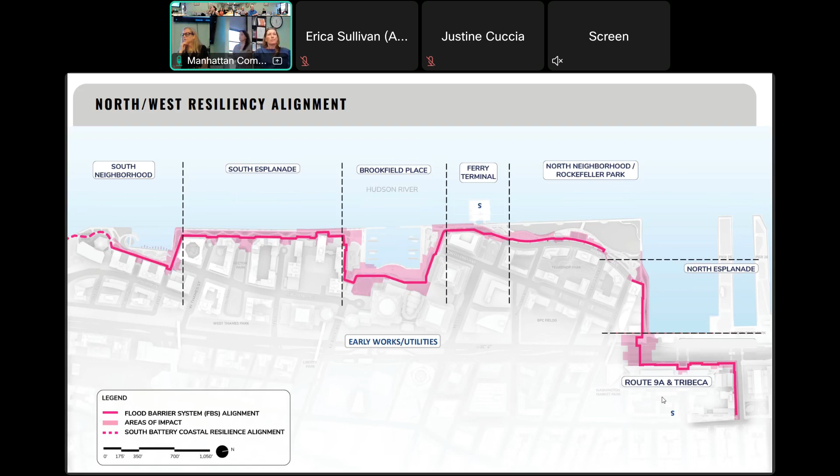Just the project objectives. You've seen us present the project before, and you're probably familiar with these, but the goal is to provide a reliable coastal flood barrier system. Yes? Aren't you not changing that particular part, or has that changed? We are not. This is just illustrative. Oh. Preserve and enhance open spaces and the cultural resources within the neighborhood. To the greatest extent possible, enhance and preserve the character, and improve accessibility in the neighborhood and the design of the neighborhood, and avoid or minimize disruption to the greatest extent possible of the below and above ground infrastructure.

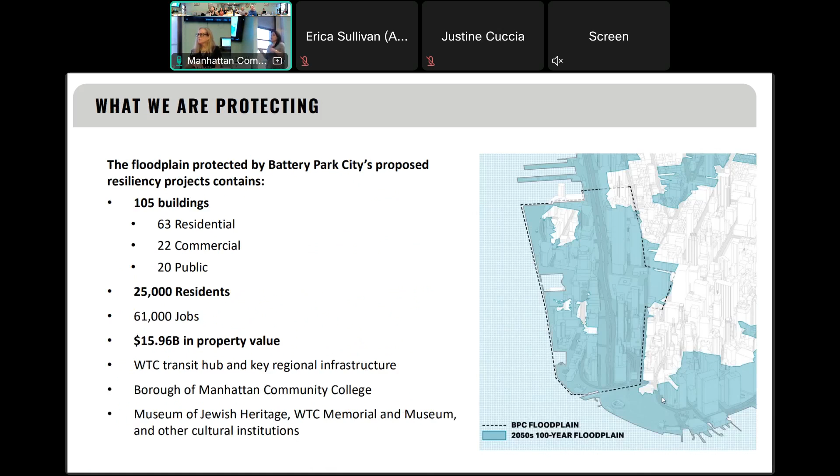So just what we're protecting: areas within Battery Park City, but also outside. This is the 2050 100-year floodplain, which as you can see extends well outside of Battery Park City. This is just sort of resiliency by the numbers: 105 buildings, 25,000 residents, $15.9 billion in property value, and significant social and transit infrastructure in Lower Manhattan.

During construction, we have temporary significant adverse impacts for open space. Obviously, we have to work along the waterfront in Battery Park City that will require temporary closures while we do that work. Transportation, obviously, to traffic and pedestrians, cyclists in the neighborhood and outside. There'll be noise emissions, and there'll also be impacts to neighborhood character because we are doing a significant construction project. But these are all temporary.

Again, as I mentioned, this just goes into more areas we analyze for land use, consistent with the Waterfront Revitalization Program, which is the city's program, open space. It doesn't reduce the size of any BPC open spaces or recreational facilities because we're basically restoring the ones, or we're not impacting them at all in the case of Rockefeller Park. We did site investigation, soil testing, and we have disposal recommendations for hazardous materials that were also signed off on by the City Department of Environmental Protection.

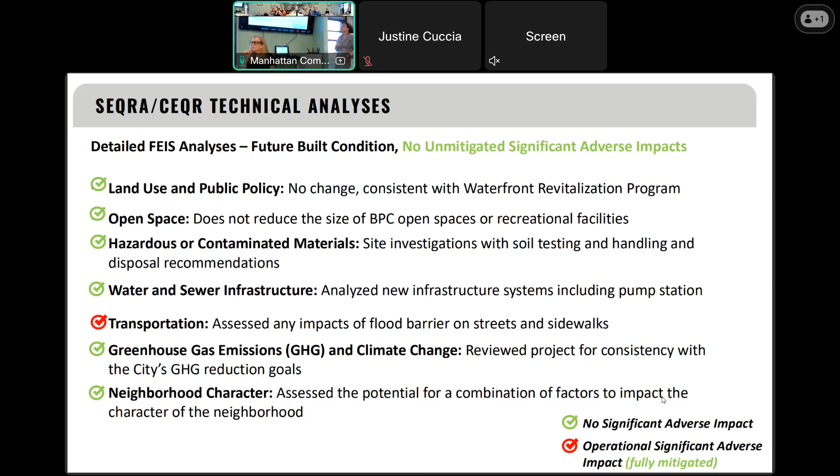We looked in some great level of detail at cultural resources and visual and urban design resources, especially given views to the Hudson River and the number of historical structures, including the bulkhead, that are in the area. Basically, we had to do a Phase 1A archaeological study, which basically means that you look and identify all of the historical assets in the area, and you identify potential impacts.

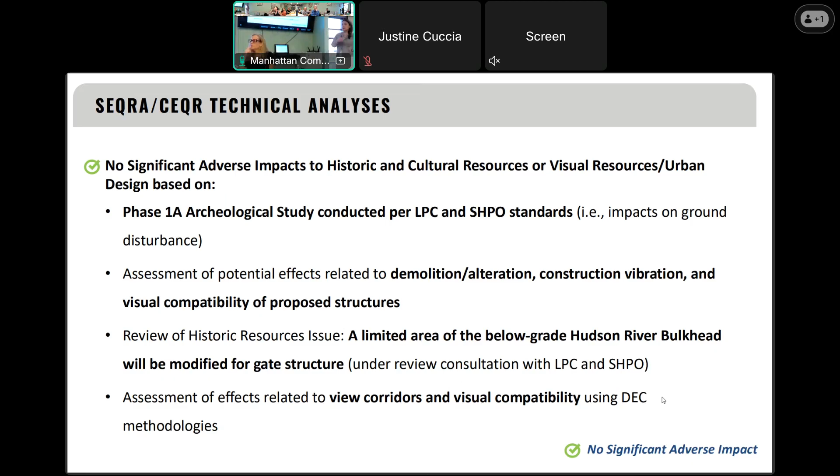There's a limited area of the below-grade Hudson River bulkhead, which runs along Route 9A, that'll be modified for the gate structure. This is under review with SHPO and LPC. And we also, as I said, looked at view corridors, especially those from the upland areas to the Hudson River and also from the Hudson River to the upland neighborhoods. Open space, again, post-construction, there are no significant adverse impacts because there's no permanent reduction in open space and there's no indirect impacts like shadows.

There are no significant adverse impacts to natural resources based on tree removal and replacement. We got a lot of questions during both our public meetings, but also in our draft hearing, about the number of trees that will be impacted as part of the project. 435 trees are going to be removed as part of the project, 6 of which are in New York City Parks jurisdiction, which means they're in the city right of way. 42 would have been condition removals regardless of whether or not we were doing the project. And 17 have currently been identified as candidates for transplant within the study area.

We are planting 450 trees within the project area, and 8 of those would be in the city right of way. We're also looking throughout Battery Park City to plant additional trees where feasible and where it makes sense, and also just increasing the biodiversity of the neighborhood.

Given the location of Battery Park City, obviously we need to look at the in-water structures, which are the piles that we'll be putting in place as part of the project, as well as any overwater structures. We're doing some decking replacement, so we had to look at the impact to the water. We had to look at impacts to river water quality, to biota or fish and other species in the water. We had to do a number of analyses as part of our joint permit application with the Army Corps and DEC about those in-water impacts. And we also had to mitigate those in-water impacts by purchasing wetland mitigation credits from the city's Saw Mill Creek Wetland Mitigation Bank.

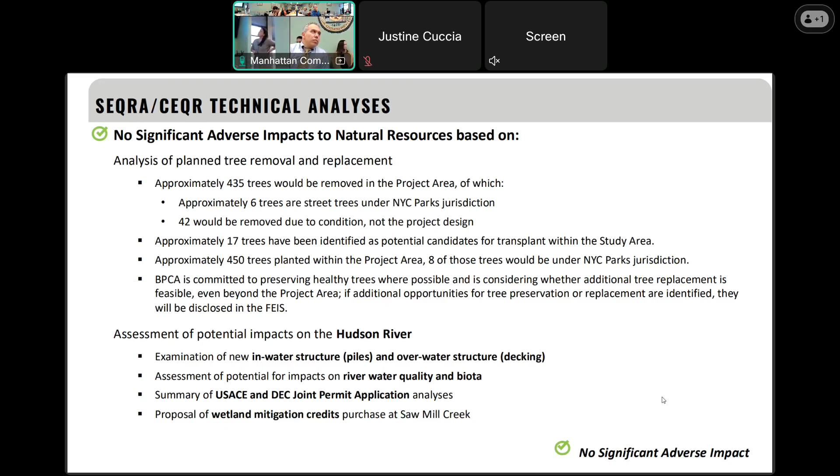So neighborhood character, as I said, there's no impacts in the built condition. We're basically not impacting the urban design or visual resources, through the integration of the floodwall into the existing landscape and enhancing the landscape design. Once the project is fully operational, the neighborhood will basically function as it did before the construction started. And as I said, the only operational impact is transportation, which will obviously have impacts to pedestrians who go through the neighborhood, also to people driving, and we're working with City DOT to work through those impacts and discuss what they are.

So again, this is just analyzing what we looked at for construction. Again, these are the areas where we have impacts: open space, transportation, neighborhood character, and noise.

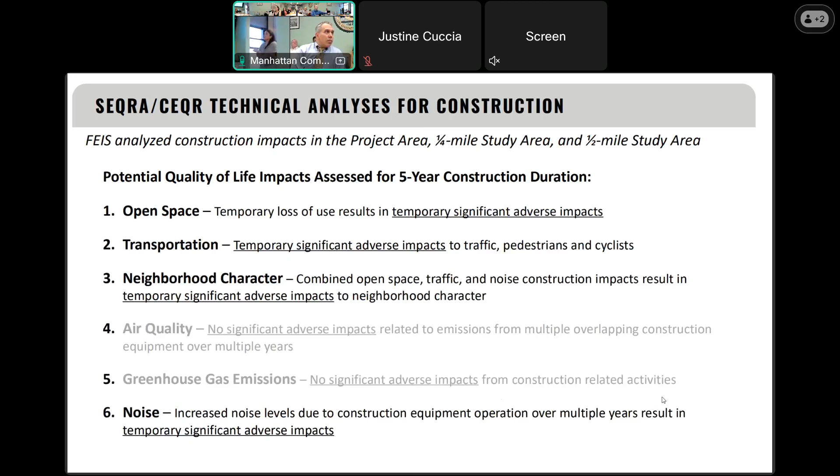For air quality, there were no significant adverse impacts. However, we are going to be publishing monthly community air monitoring reports, and we'll get air monitoring alerts in real time as we do work on site and can report those out. That has been a question I think we've gotten from a lot of people as we're talking about this. But that is something that's possible. We're doing that on our South project too. If we get air quality exceedances, we do get them in real time.

I don't mean to interrupt, but who determined this? These are the thresholds we have to look at for SEQR and CEQR. So the only comment I will make is if you live at 50 Battery, your idea of what a threshold is is exceedingly different than if you live across the street. And we've heard that from the neighbors time and time again, that it's not necessarily the same experience.

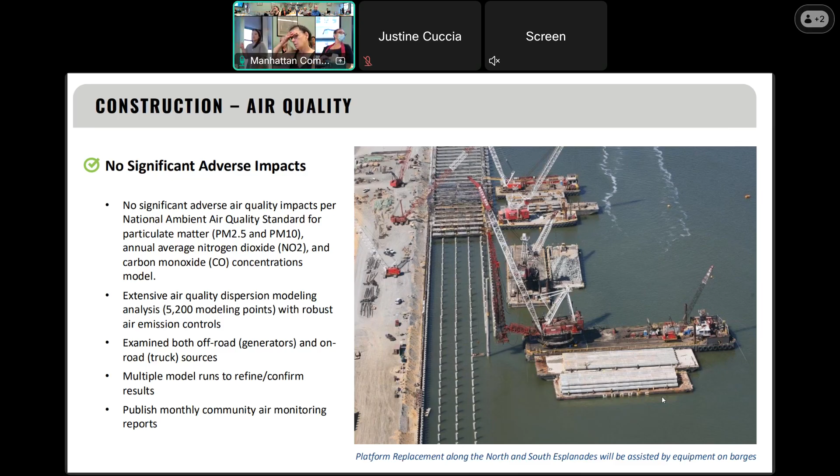What's the concern about the Northwest project is almost every part of the project will be closer to the experience that 50 Battery has had, which will be significantly different than what you have for the South Battery Park City. So, we're gonna go into it a bit more and into detail of how we're trying to mitigate this, because, are you talking about noise or air quality, Tammy, or both? Yes, both. I like how you just answered yes. I assumed it was both.

Okay, so for open space, as I said, we're gonna have temporary significant adverse impacts because even though we'll be phasing the work, there'll be areas that will be closed. We are working on phasing the reopening of those areas as they become available and are safe to reopen. We have proactively looked at potential mitigation. We're undertaking a master planning effort with Arabesque to identify new potential open space areas, also a whole new wayfinding program that helps identify open areas, closed areas, and helps people get around the neighborhood more generally.

We're also looking, and I think we are coming to the community board next month to talk about this at the BPC committee in more detail. Yes, we did get an email after the last BPC committee meeting about some of the outreach from BPCA, from the PTAs of 89 and 289, that they were unaware, they had not seen any presentations, and they were a little bit concerned that anything would be implemented before they had opportunities.

Because again, at the end of the school year, they're out. And for Stuyvesant, as probably our high school student can tell, they're on Regents Week, so their last days of classes, if not already done, are this week. So trying to get a PTA meeting that you can present at to explain what's happening or get information out to those 3 schools doesn't seem possible until maybe July or August when they're not here.

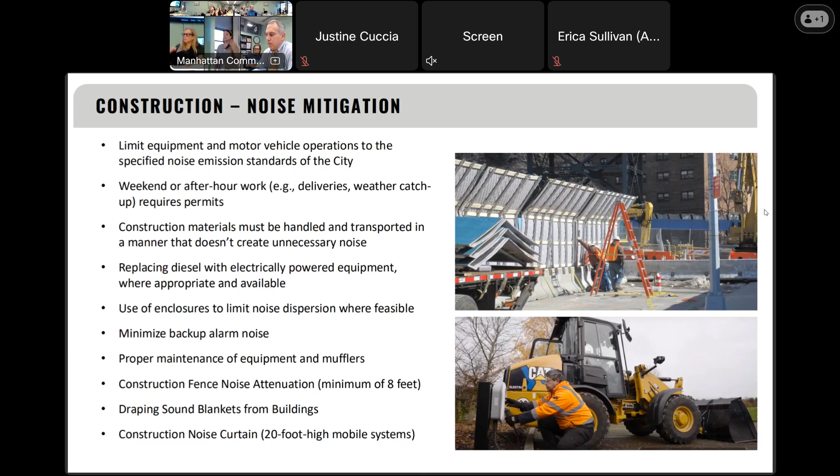For those of you who live in Battery Park City, you may have seen we were doing some test pile work - we had fences as high as 14 feet. We're going to be working with buildings on the fence height and what's appropriate based on their ground floor or second floor uses. Also looking at draping sound blankets from the buildings, again in consultation with the buildings, and potentially using construction noise curtains, which are 20-foot high mobile systems. We're really trying to do our best to come up with solutions and be creative about how we mitigate the noise to the greatest extent possible.

So again, neighborhood character - obviously during construction, there's going to be impacts because we're going to have closures. We're going to have open spaces that are not going to be available. The exception is Rockefeller Park, which will be open during construction, but a lot of the other areas will not be. Again, these will be phased, localized, confined largely to the areas along the proposed project.

We're again working on making sure our signage, Wendy, I know that's always something you've shown, is clear. We're notifying people in advance as soon as we know, as much as we know, as frequently as we can, because it's going to be disruptive - we're not saying that it's not - but we want to make sure this is as painless as it possibly can be.

It's not, there you go. Okay.

So again, there are some traffic impacts that are hard to mitigate. Like some of them are pedestrian rerouting and things like that that you can't avoid because there's limited sidewalk area and we have to take up a bunch of the space.

Obviously there is some temporary construction open space impacts while we're doing work on site. I mentioned how we're going to mitigate that, and also noise, and how we're working to mitigate that. In terms of noise mitigation, this is all in consultation with the buildings. We've been doing regular meetings with all of the buildings, and as we have more details about construction staging and phasing, we're going back and continuing those conversations so that we can bring people the information they need as we have it.

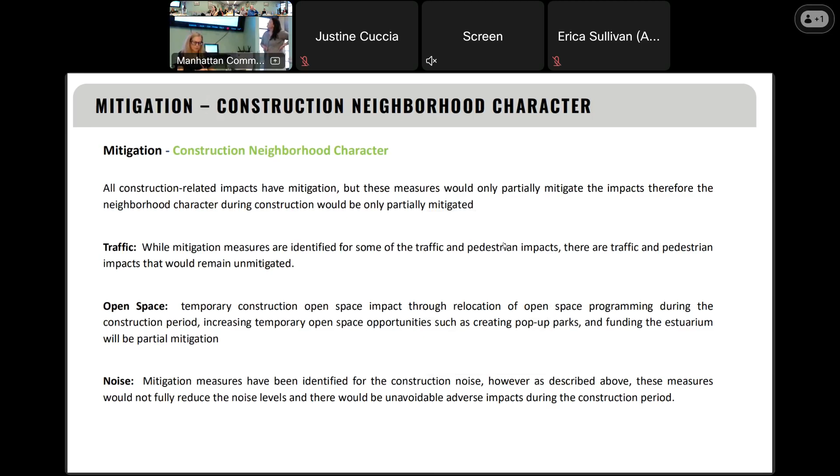Point it this way. Yeah, can you fix that? Fix it? What's wrong with that? It's okay, it's okay. There you go. Thank you.

So 9A, for the most part all along 9A, at N. Moore, at Harrison, at Laight, and at Vesey Street, it's going to be mitigated through signal timing changes. For pedestrian mitigation, it's probably going to require the removal of some decorative street elements and street furniture. In some areas there will be, as I said, unmitigated significant impacts during construction peak.

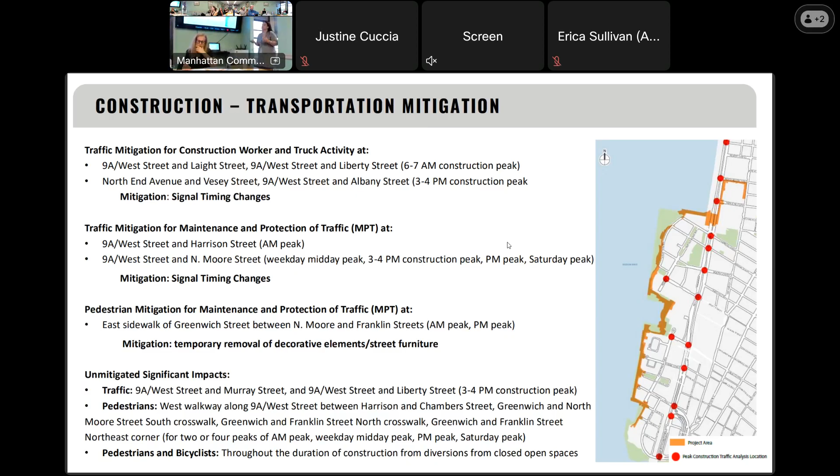There'll be rerouting of pedestrians. We are still in consultation with city DOT. None of this has been worked out yet. We just started having conversations with city and state DOT on how we develop this maintenance and protection of traffic plan. As you can imagine, it'll be a lengthy conversation, but that has started, on how we can do our best to make it easier, especially for pedestrians, because it's going to be very disorienting for lots of people. For everyone, say.

So as part of the EIS process, we're required to look at alternatives, and we can consider basically a large range of reasonable alternatives. And the goal is to pick the one that is basically the least impactful.

So just as a refresher, what we looked at is the inboard alignment, which is essentially what our alignment is. But early on, for those of you who went to our public meetings, we looked at an outboard alignment, which would have been on the waterfront side. So those are both described in our EIS, as well as some other alternatives: the no action alternative, which means we don't do the project at all, and the design alternatives. The most significant that you've probably heard about is the 9A crossing, the Harrison Street Gate crossing, some of the design options at N. Moore, and locations for the pump station.

Just to give you some key comments you'll see in this document that we circulated, we got a lot of comments on impacts to trees, landscapes and views. We got a lot of significant comments on water quality impacts in the Hudson River estuary, specifically related to the pump station, floodgate design and operation, who operates, who maintains, and construction impacts, obviously phasing and activities, noise, air quality, closure of open space, operation of community facilities and businesses during construction, and obviously street and sidewalk closures.

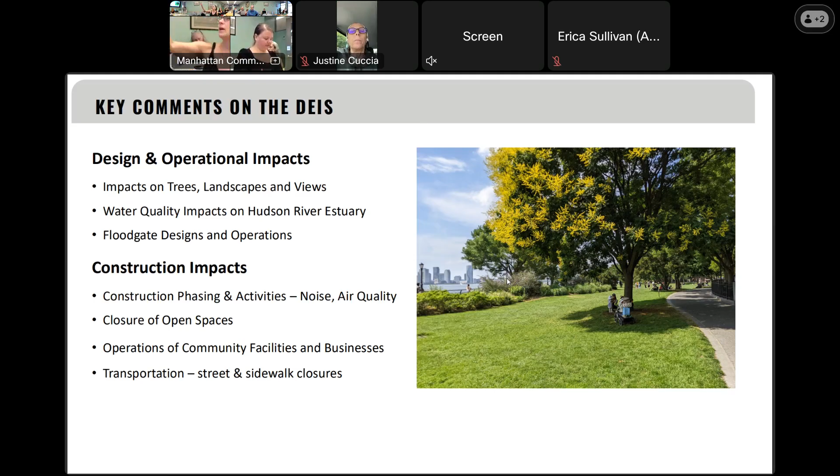Bob White did work on this for us. Marjorie might have been on the call, but we did look at all the addresses - if you go into the noise chapter, you'll see all the addresses we looked at. This is just a representative sample. Bob just popped in, so I just promoted him.

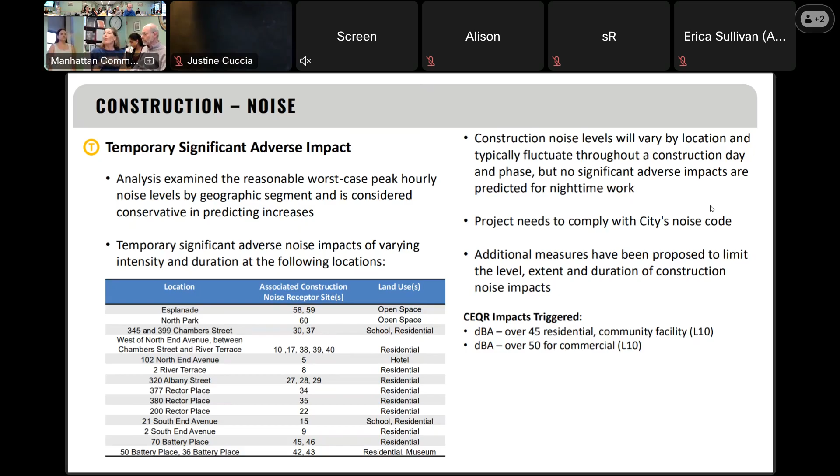The second one is, as the residents were saying, once you start blocking everything off and doing construction, there's a lot of people who use our parks, not just residents. They run through it, they come from the West Village. People can run like 10 miles a day. I can't, but they do. Our neighborhood is a place where everyone comes, and there's running groups now, 30 people running at a time. People have literally been knocked over around the corners.

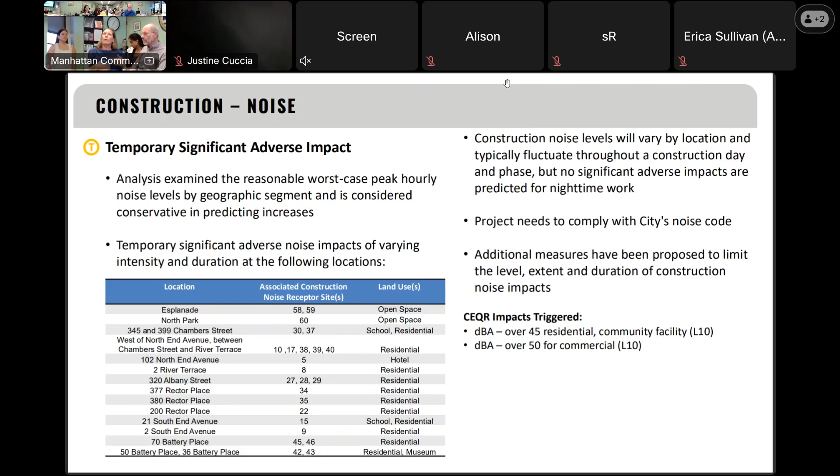And I'm just concerned, one of our board members, Betty, was discussing that with the runners coming around, it's dangerous. I would love to know what you're gonna do, if you've looked at that, and if you have people come into the neighborhood on the weekends and just take a look at the traffic, which is a mess.

The third thing, and again, I told you I have a lot and I'm gonna submit the rest, but the third thing I really wanna get out is, did we determine whether Pump House Park is being destroyed, the trees?

Or not? We have to remove trees in Pump House. They're actually documented in the EIS, the trees we have to remove. Yeah, do you know how many? Off the top of my head, no, I don't. But we have it in a reach by reach section, and also we have it outlined per Pump House.

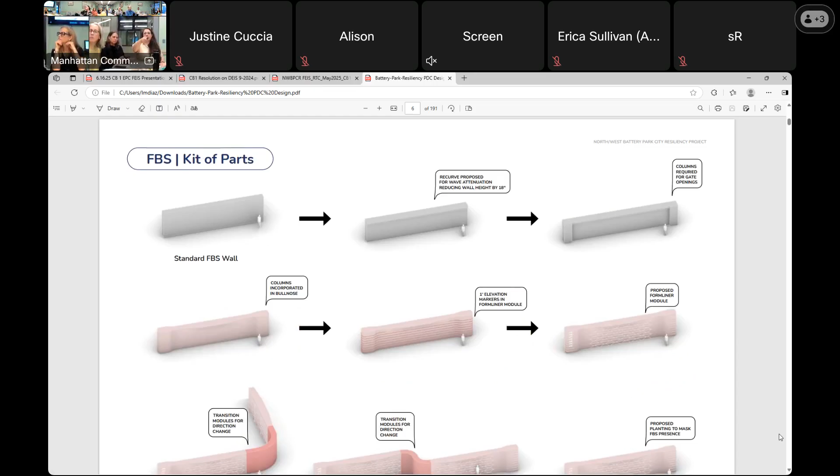So I'm gonna flip through the slides that we skipped for the PDC presentation so that we can go right into the meat of how we presented it for them. If we want to revisit some of these slides, we can. Some of these slides are from previous presentations that you've seen in community engagement meetings as well. So this is looking at the FBS experience. This is a kit of parts that we put together for how we came up with the design of the flood barrier wall. And then this is a small vignette that talks about the design and experience of the flood barrier wall.

We did receive a comment from the PDC in some of the early submissions asking why the wall is thickened where we have the gates. This looks very large and ungainly. This is actually an engineering strategy. We need these larger columns at the gates in order to support the weight of the gates themselves.

So this is looking at some of the module layouts for the flood wall. We have larger, smaller modules. We also have strategy for transitioning modules around corners. Does module mean a section? Yes. Okay. So we've laid out the flood barrier system in 8-foot increments, which is the maximum length of form liner that is recommended by form liner manufacturers.

And so we've worked with form liner manufacturers in order to come up with this 8-foot module with this pattern that you see here that can vary across the site in a couple different ways. The way that this has been presented at the last community engagement meeting, the way that we came up with this scheme is that in larger portions of the wall, this pattern tends to stretch out. And then as you get closer to gates, you start to get this smaller pattern.

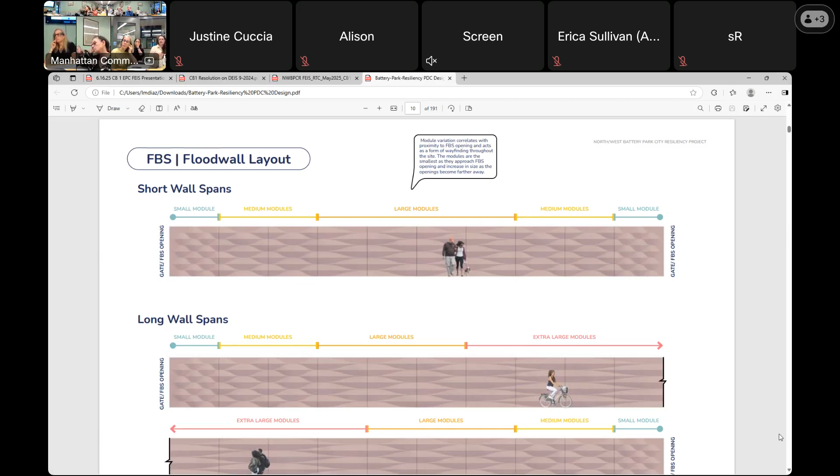I've noticed that you have them around now on the other fronts. Yeah. Right? And so there's the barrier, there's the plastic barrier, and then there's fencing. Right? They're all gonna be 8 feet high? Not all of them, no. It's just that the length of the form liner module is 8 feet long. The wall is different heights depending on where it is on the site and how far inland it is. Okay. What's the maximum and what's the minimum, please?

Off the top of my head, I believe the maximum is 8 feet 6 inches, and then just up to 10 at North. Can you say that a little louder? And the smallest? It's 2 feet high. Okay, so you said 2 feet and then up to 10. Okay, thank you. So 2 feet is where? River Terrace. And 10 feet is where? North Moore. To clarify on River Terrace, it starts from 2 feet and goes gradually up to about 4 feet.

Gotcha. And the wall along BMCC from Chambers, from wherever you cross midway and go up, is at what height? Is that 10 feet the entire length of it? It is for most of it. That is actually one of the most vulnerable areas on the project in terms of resiliency, and so that is where the wall is the highest.

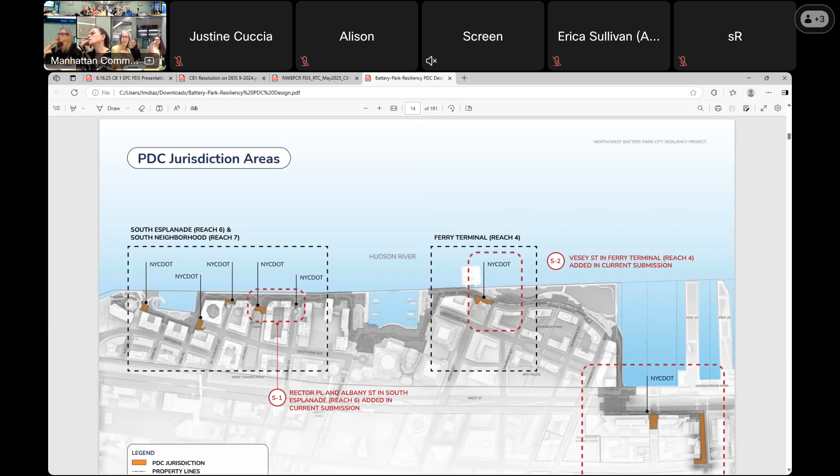The more substantial areas are in Reach 1. Even here, some of the project areas are within state DOT jurisdiction, and that's not subject to PDC review. So we have a piece at Harrison and then the majority of North Moore, the south side. So on the next few slides, we're looking at these a little more closely. You can see the street ends in reaches 7 and 6. So we have First Place, South End Avenue, West Thames, Rector, and a tiny piece on Albany.

And then at the Irish Hunger Memorial, the area that you see in orange on the right side, that's actually part of City DOT right of way. So that's kind of a visual continuation of River Terrace where it meets Vesey Street.

I just don't understand something here. Could you just explain why some areas are under PDC, why some are not? Good question. It's a great question. I can explain why. The Public Design Commission has jurisdiction over the city right of way.

And so in Battery Park City, some of our right of ways or streets, like River Terrace, are owned by the authority. The authority owns River Terrace, we own North End Avenue. And originally we owned all of the streets in Battery Park City and then handed them over in a deeded process to city DOT. However, there are these bits and pieces that still fall within the city right of way.

For example, First Place, for those of you who have lived there for a while, First Place was supposed to be like a regular cul-de-sac, very typical Battery Park City street. If you've been by the Museum of Jewish Heritage, you know that that's the opposite of what it is. It's been closed to vehicular traffic. It doesn't have normal street geometry. So that's one of those. It's technically a city right of way, even though it is closed to the street. We are working on correcting this over time, but obviously it's a process.

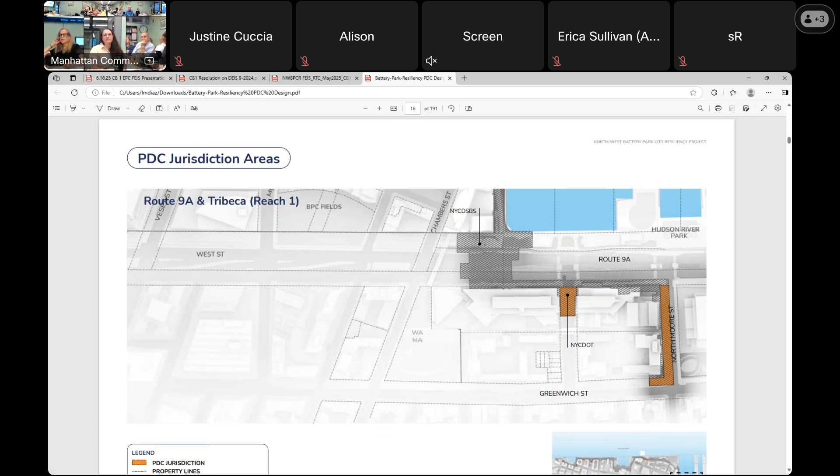So you'll see this presentation was structured with the focus on these bits and pieces, but the commission is interested in understanding the project as a whole and not just the snippet. So it's somewhere in between. We're starting at the south, with South Cove, which you all probably know very well. We have a slide of existing conditions for those.

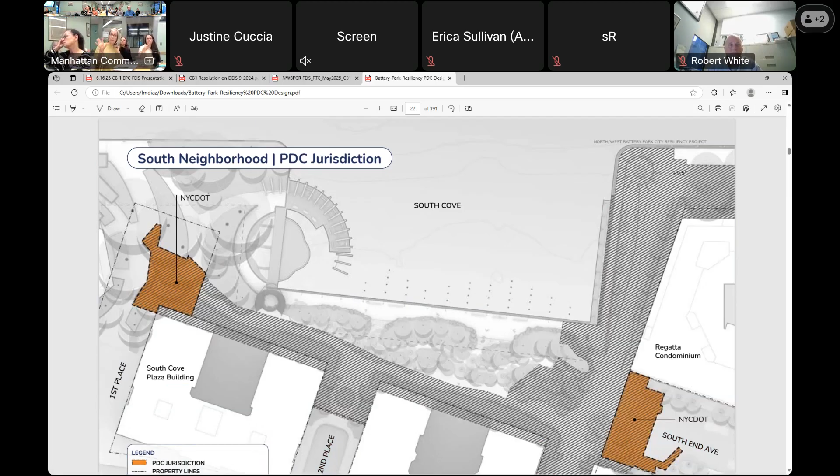On the next slide is the illustrative plan of existing conditions. And then if we keep going, this is the proposed plan.

I want to talk a little bit about the process with PDC, because we did have a somewhat informal, pre-conceptual conversation with them as part of the sidewalk. This is the level of development the plans were at that time. On the next slide, marked as revised conceptual submission, this is where the plans are when we actually present it to the commission.

So the changes in this area are very minor. We expanded some of the planted areas in South End Avenue, but speaking more broadly to the design here, you all probably know this very well.

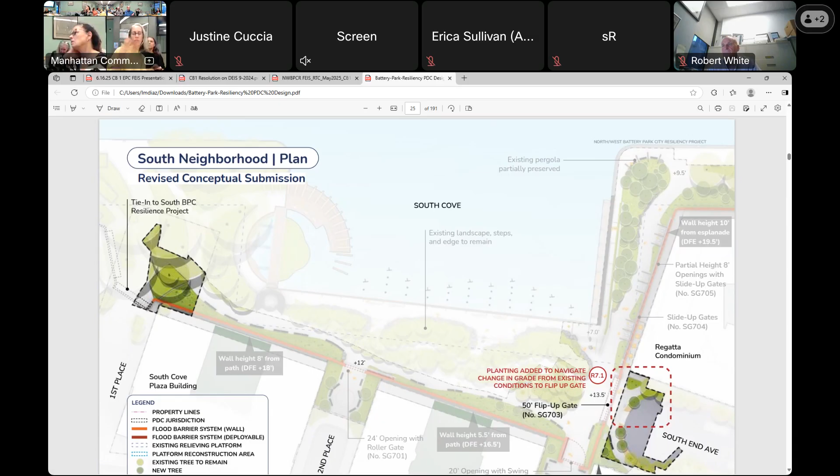South Cove, architect and landscape architect collaboration: Mary Miss, Susan Child, and Stan Eckstut. We work closely with Mary Miss to try and maintain and preserve the design intent. In order to do that, the flood barrier wall here is pulled as far away from the water's edge as possible, really hugging the existing privacy walls of the building so that we can minimize the impact on the existing honey locust grove and the unique experience in the South Cove.

Does that also raise the privacy wall against the windows so people who have a view now will no longer have one? No.

The height of the privacy walls at these two buildings is not consistent, it goes down a little bit when it aligns with their courtyards. But the height of the flood wall, if I remember correctly, is about 6 inches lower than the height of their privacy walls that's in front of the apartments.

Thank you. And it'll butt up against, I live right there, so it'll butt up against the current privacy wall and not be in front of the landscaping right now. It will be.

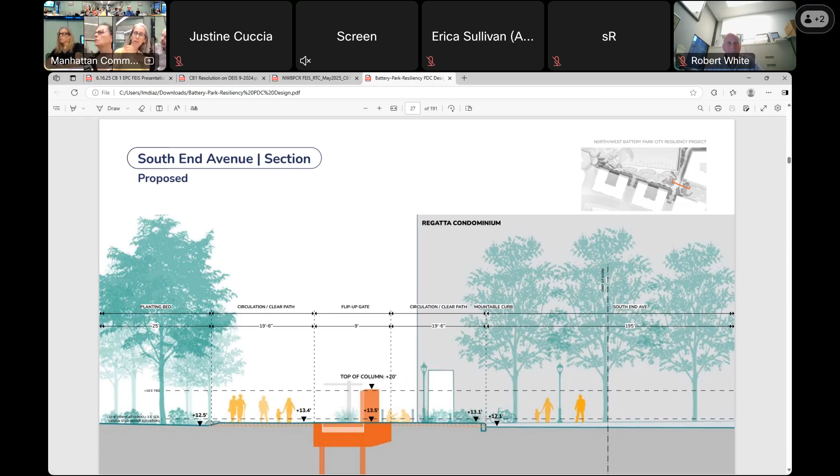Next slide is the view. This is an earlier view that we had shown to PDC previously. They require in all their presentations to show any previous materials you've shown them and then show how those have changed, so that's why we're including some of the older stuff.

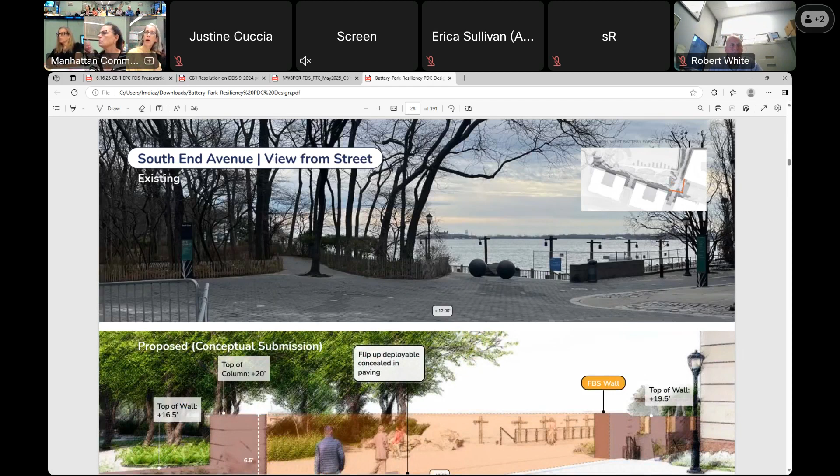But if you go to the next slide you can see the most recent. This is getting a little cut off at the bottom, I don't know if you can zoom out or scroll. There you go, thank you. So you can see the opening and the darker gray band, that's the flip-up gate, and you can see the thickened columns that Rachel was mentioning on both sides of the gate and the wall. Again, you can see, looking from South End Avenue, maintaining that view.

We can go to the next slide. On the next slide, we're looking more closely at the materiality. Gotcha, yeah, we go there. Oopsie, did I go too far? That's great, that's great.

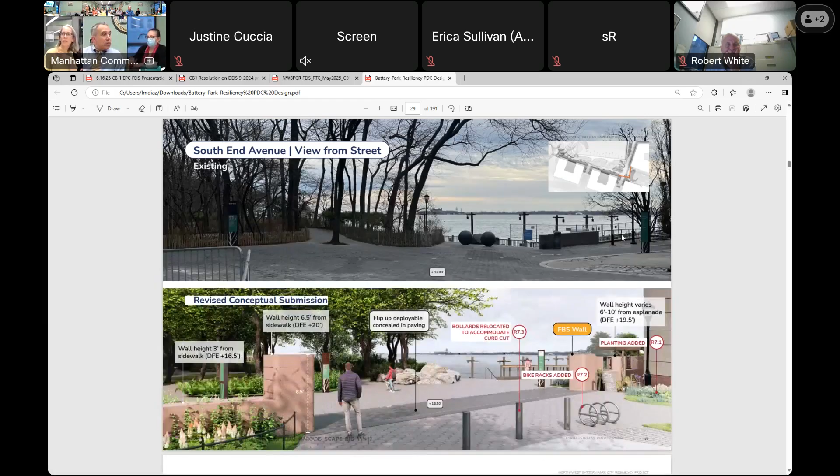So it's another thing that PDC likes to pay very close attention to. You can see the hex asphalt pavers, the concrete wall itself, the FBS wall. We are including stainless steel bollard sleeves, so there will be removable bollards here to allow for ambulance access. We're putting back the bike racks, and we're putting back the cobblestone in the areas where they currently exist, which is in the furnishing zone, not where we want to maintain pedestrian accessibility. And then we have planting around the FBS wall with a new flat rail to protect the plants.

Those cobblestones currently have now been replaced by permeable cobblestones. Are you gonna put permeable ones? So throughout the project area, within Battery Park City Authority, wherever we can, we're using permeable pavers. The project that was done there was a pilot to test different types of permeable pavers in different parts of Battery Park City. We're using the knowledge from that project in the ones we're installing here. So specifically here there will be cobbles, but in many of the other project areas we're using different types of permeable pavers.

Can I ask, I don't remember bollards being at the end of South End now. I remember there was a move to use natural stone and things like that for barriers versus bollards, which are very industrial looking. Can you explain why the move to something like bollards?

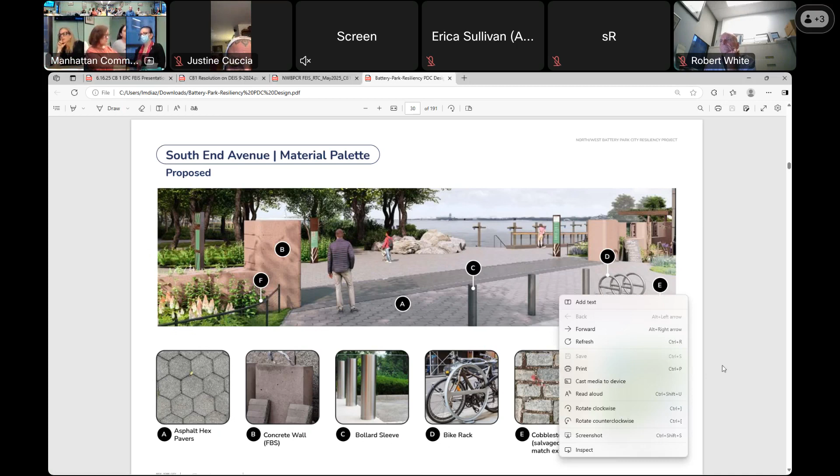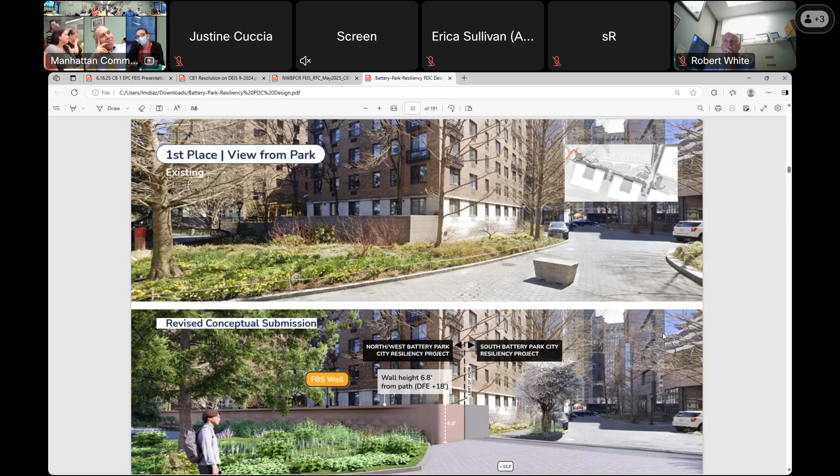Gotcha, next slide - I think we're again looking at materials. The intent here, the planter we see on the left is going to be impacted by construction, and the intent is to reconstruct it to match the existing conditions. Other than that, in terms of materiality, same pavers and the wall.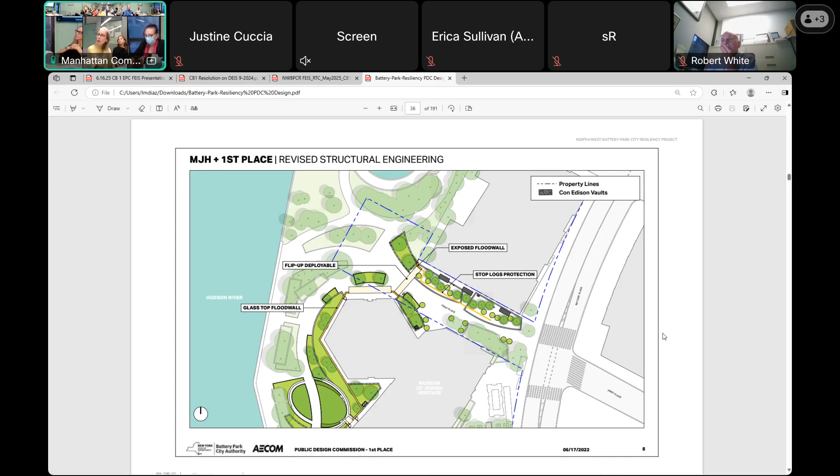I think we can continue on the next slide to Reach 6. And this is where the maps meet. Reach 6 is a little bit faster because the areas of PDC jurisdiction are much smaller. We're looking at what we call the three street ends, where West Thames, Rector Place, and Albany Street terminate into the park. Each of these have a little bit of a different treatment, but for the most part, we're looking to replace the material that is there in kind that is within PDC jurisdiction. So we'll talk about that.

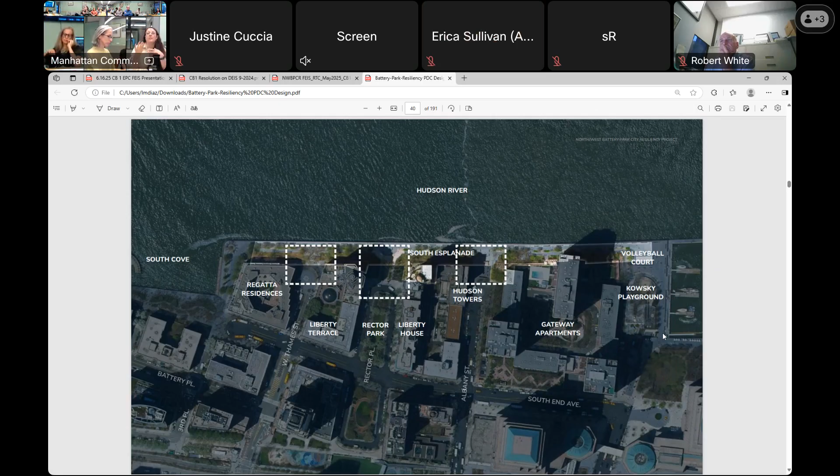We can go to the next slide. Yeah, so these are the existing photos again that we have of each of those areas. And on the next slide, we go through the same jurisdiction map. So all of the areas in red are BPCA property. All of the areas in blue are New York City DOT. And so as our limit of work line overlaps into the New York City DOT, that determines what is within PDC jurisdiction for the project.

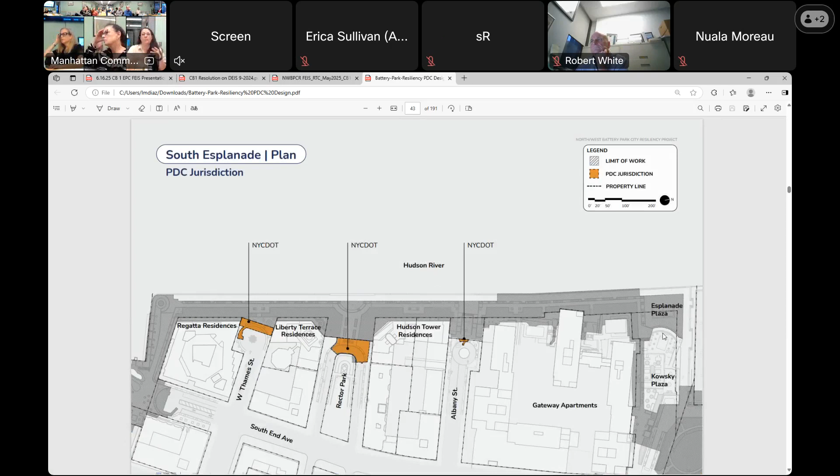And so if you go to the next slide, you can see that it's very, very small areas within the project. And within each of these areas, again, most of the material that is being disturbed is being replaced in kind. So we're replacing the existing stone curbs that are there, the cobbles, the tree grates, the light poles. We can go to the next slide.

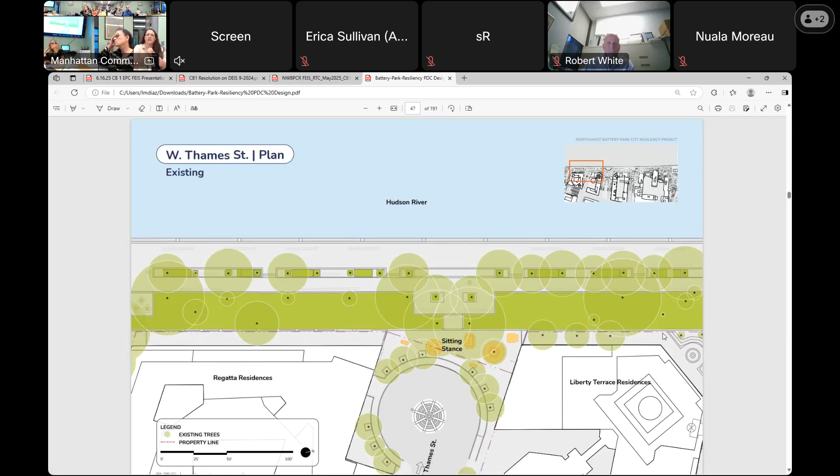The area that has the most impact within PDC jurisdiction is in West Thames, because part of our wall falls into PDC jurisdiction here. So again, this is showing BPCA property versus NYC DOT jurisdiction. The next slide shows the overlap with our limit of work line that shows what is in PDC jurisdiction. This is the existing plan that we have here. You can also see that we have Sitting Stance at this street end. And in the next slide is the proposed plan. This is what we proposed for our concept submission.

And this is actually another great area to talk about with you guys, because some of the feedback that we received in our last community engagement meeting is that the way that the gate was crossing the street end, not perpendicular to West Thames, was closing off the view from the street to the Esplanade. And you guys asked us to look at a couple different studies to either widen the gate or reconfigure the gate so that you can get better views down the street. We're a little bit constrained because we don't want to locate the gate and the gate monolith on the platform structure. That would be incredibly expensive and require the replacement of lots of platform and a lot more construction.

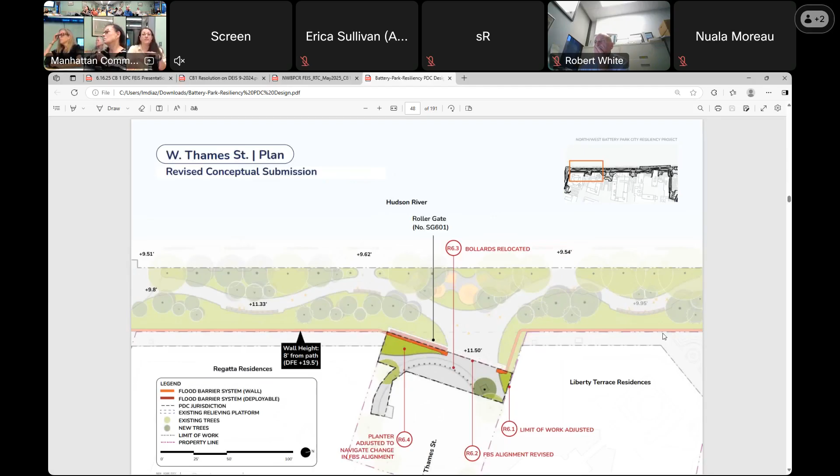And so what we did on the next slide, we actually pulled the gate farther inland, and then we rotated the gate configuration so that it's perpendicular with the center line of the street. So as you're walking down the sidewalk of West Thames or driving down West Thames, you can see right through this 50-foot opening in the gate. What this does do is it puts the wall within PDC jurisdiction. So this is one of the areas where they can comment and make recommendations on the wall.

Another couple things to point out is we are proposing bollards in this area to keep vehicles off of the platform and off of the Esplanade. We are replacing some trees, and then we reconfigured those planters. In a lot of areas, the design intent and goal was to use plants up against the FBS as much as possible so that you don't have this large stark wall. And so in this area, you can see that we've reconfigured these planters to do just that.

And sitting stance, thank you. Sitting stance is being relocated to what we call the wet side of the wall. We've actually designed an entire node, and its intention is to house it, so that people are still able to access it in a little bit more of a natural setting. Where? It's actually in the grayed out area.

Since this is the PDC presentation, we weren't highlighting its new location because it's not within their jurisdiction. But if you look directly below where it says bollards relocated, that text bubble, you can see faint orange outlines within that node, and that is where it is relocated. So you're gonna put it against the water? Sorry if I can interrupt, so you're gonna put the seating nodes against the water?

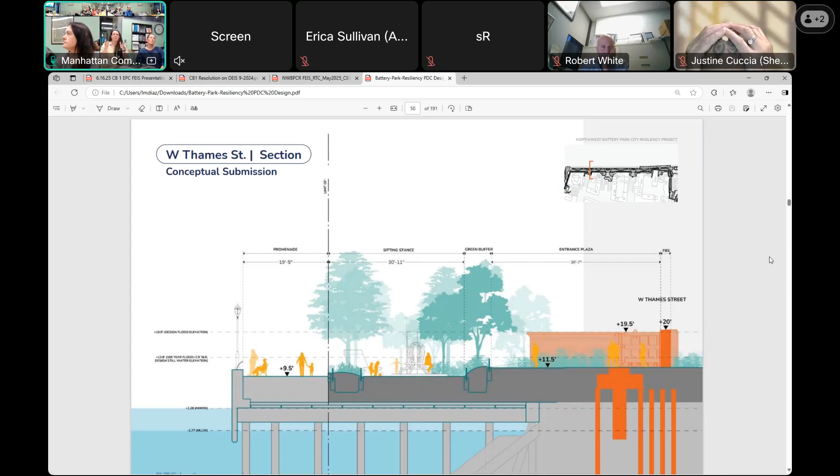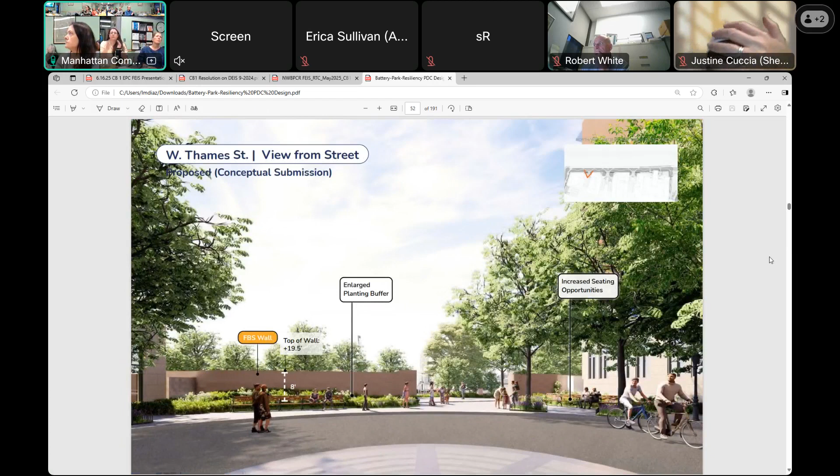And in the next slide, we go through an existing photo of what's there today. This is the photo of a concept submission, and this is where we received the feedback that the orientation of the gate here makes this opening look really small. And so in the next slide, it'll show you how much larger the opening is when you turn it perpendicular to the roadway. We got it. Oh, great, okay.

And then again, some of the changes here that we highlighted for PDC is some of the planter geometries were adjusted to respond to the wall alignment adjustment. We are relocating some bollards and adding new bollards, and then the wall itself changed in its configuration. And then the next slide goes through the various materials that are in the area.

So we have the asphalt hex pavers. We're looking at integral color concrete with a form liner for the wall itself. There will be New York City DOT standard concrete finishes. We also have some existing stone walls that are in the area that will be reconstructed into their current location, as well as the new bollards. Are you keeping the same materiality for the stone?

Yes, we are. We're gonna get regular city sidewalks versus the hex pavers that are there now? Oh, I see. You mean by the buildings, we're gonna get regular city sidewalks where there are currently regular city sidewalks. Exactly. Thank you. Sure. Can you clarify, because currently in the back of most of those buildings, there is not necessarily a privacy wall that curves around the backs of the buildings onto the side streets. That's right. So there are a series of either walls or gates that terminate at each street end behind the building.

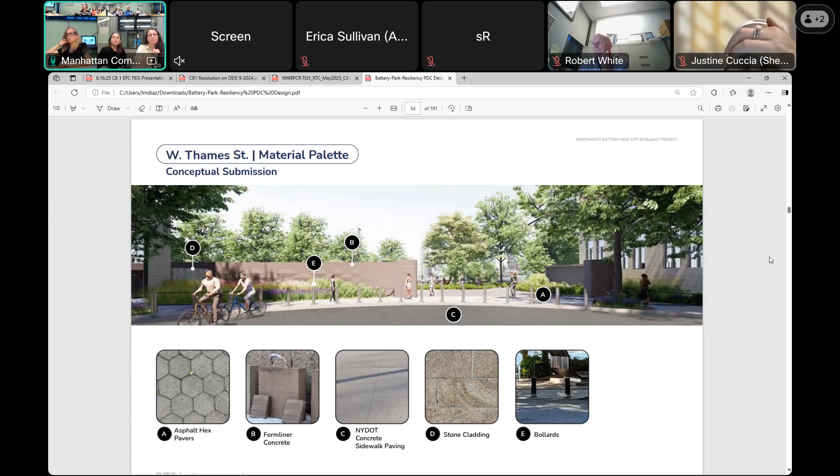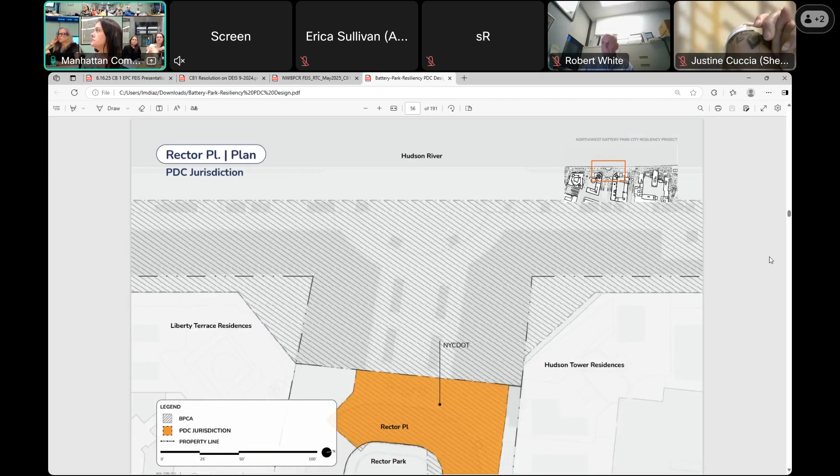Okay, thank you. Sure. And so we can speed up a little bit here because the PDC jurisdiction areas are super, super tiny. So at Rector Place, this is the NYC DOT jurisdiction map and the BPCA ownership map. Here, it's also showing the overlapping PDC jurisdiction. On the next slide, we have the existing plan. One of the big pieces that I think everybody's really familiar with and in love with is the Rector Place art piece. This will be protected in place throughout construction.

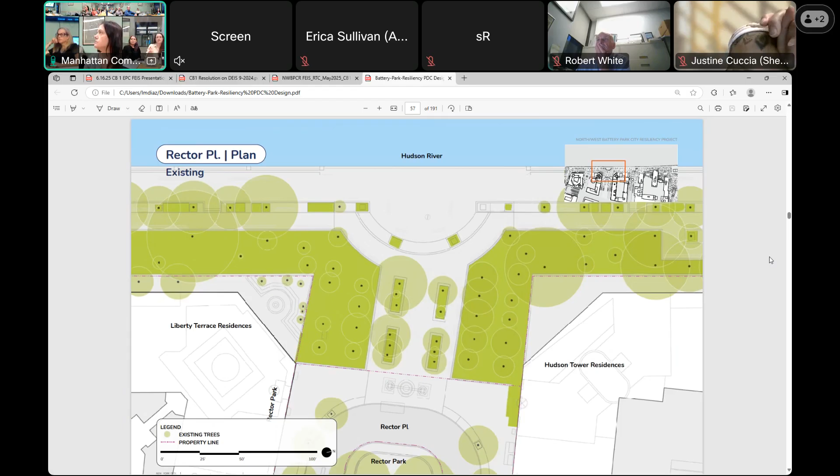And in the next slide, showing the proposed plan, this is showing the tiny little portion of Rector Place that is within PDC jurisdiction. There are minimal new materials that are going on here. The largest change that we're showing is the addition of bollards. And we can flip through that really quickly as well. Is that just one question?

It may just be because it's PDC submission, but that entire area of the Esplanade has really great seating that wraps the sides of Rector. It looks like it's all gone. I see just two little benches in here, but the rest of it looks all gone. We actually have a seating node at the street end as well, which is in the grayed out area also. Okay. But I mean. Yeah. Point taken. Next, we're in a hurry.

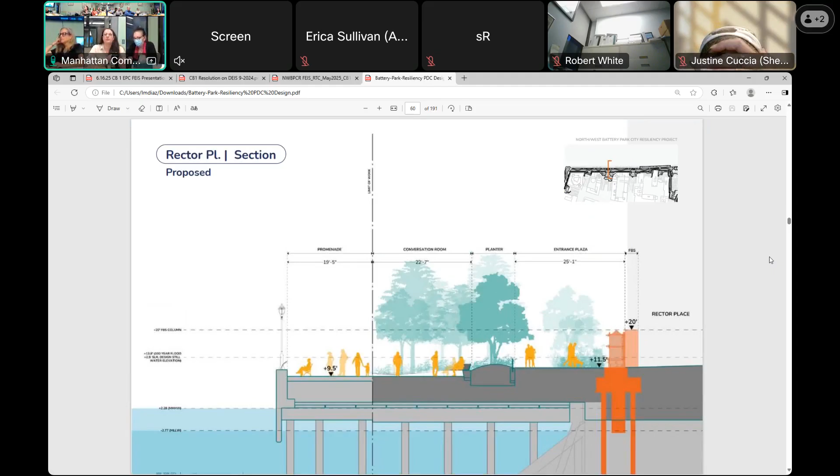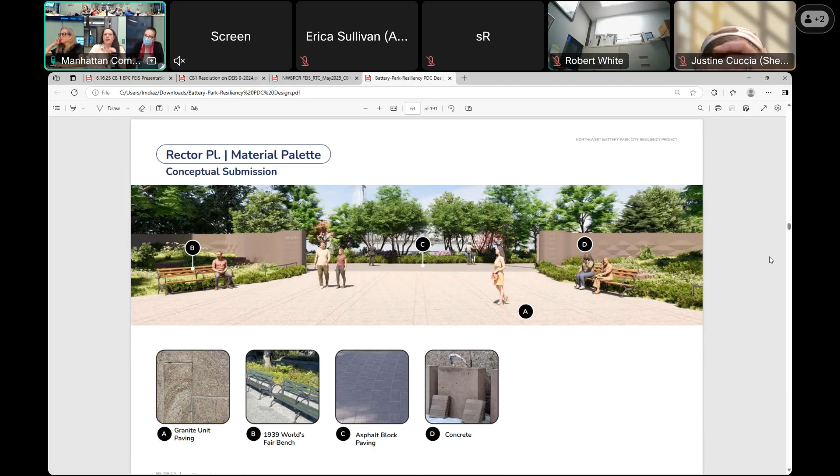Okay, so anyway, existing and proposed section here. Again, to Buddy's point, we have a seating node here. You can also see the new gate in section. And the next slide. This is showing the view from Rector Place, and then we go through the same kind of series of slides that show the concept submission. And then the next slide shows the materiality: the walls, the benches, asphalt block paving, and then the integral color concrete.

So it is all concrete, it is not marble, right? Where we have all that beautiful marble in that area, used primarily as seating benches, all of that is gone. And I only see two benches, so one of the questions becomes concrete, which is not so fantastic for heat, and not as much seating. Sure. That's definitely something that we can look at. Another one of the comments that we received from one of the building stakeholders is that there is a lot of hardscape in this area, and we have to come back and study adding some greenery. So that's something that we're looking at.

Another thing I want to add is, all of the materials in this area are to be replaced in kind. So if you are seeing that, or it's actually granite, not marble, if you are seeing that granite paving, the granite paving is what's going to be there in the final condition. That's great. Thank you.

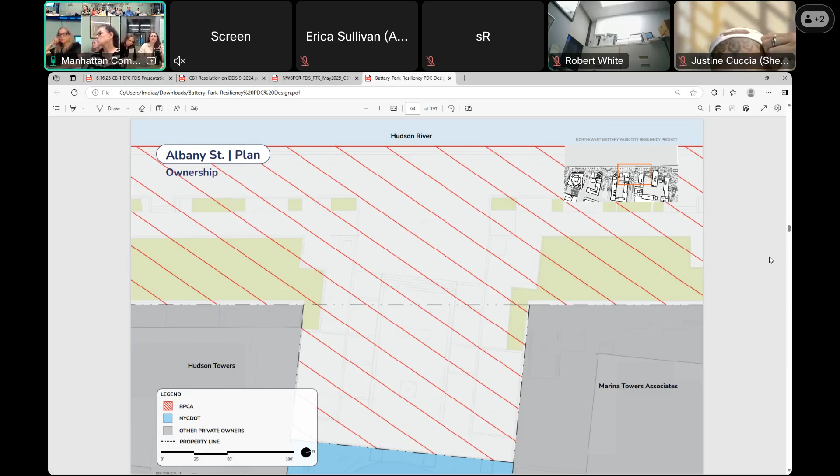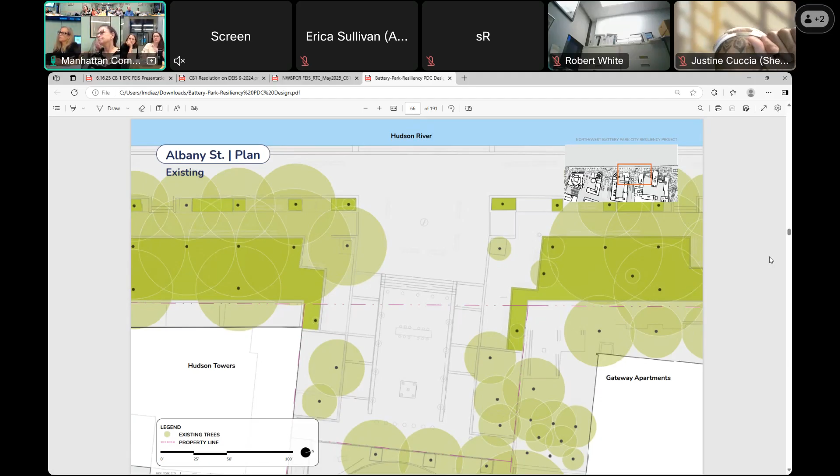Sure. And then Albany Street is probably the fastest, because this is the ownership in New York DOT. This is the PDC jurisdiction area, which is the smallest of the street ends. The next slide shows the existing plan. This is showing the upper room, which is to be decommissioned as part of the project. And then the next slide shows. Thank you. Sorry.

It's below. Understood. In the next slide, it shows the concept submission, and this is the existing section. The next slide shows the concept submission on the proposed section. And then in the following slide, we'll go through two different existing views, and then the proposed view is here.

One of the things, we do love the upper room. There's no picnic area like that. The whole point of the upper room was it was a place to sit by the water and eat and picnic without having to buy anything like you have to at Brookfield. I'm confused as to why the relocated Brookfield art would come here into the residential zone versus keeping it in the Brookfield zone and letting this space have seating and picnic, which is what the community uses it for, gathering.

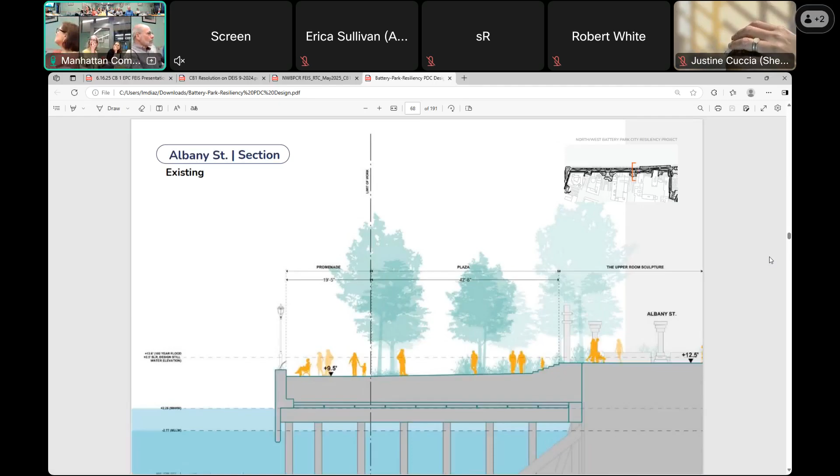It's not a place that you can gather. We're talking about places that people gather, not sit next to each other like this. We're talking about people who bring food and sit and gather. It was a community outdoor space. And the kids do go all by themselves. They could play there, you could see them. During COVID, we celebrated every single holiday there, including New Year's.

I'm sorry, why aren't you keeping it? You cannot keep the piece, it has to be deaccessioned, it cannot be deconstructed and put back in place. That's not the way it's constructed. We consulted with the artist about this. We also have a DEP pipe that rests right under the upper room and we have to do drainage work on that as well. We heard a lot about whether we can take pieces of it and put it someplace else, but it's not meant for that. Which is fine, then having the purpose of what it was in some way reinstated.

No offense, but the Brookfield art, that's not art. My dog loves that. The dog loves it, that's great. Exactly. The dogs love to pee on it. It's too low. It belongs in the commercial zone. There's no gathering.

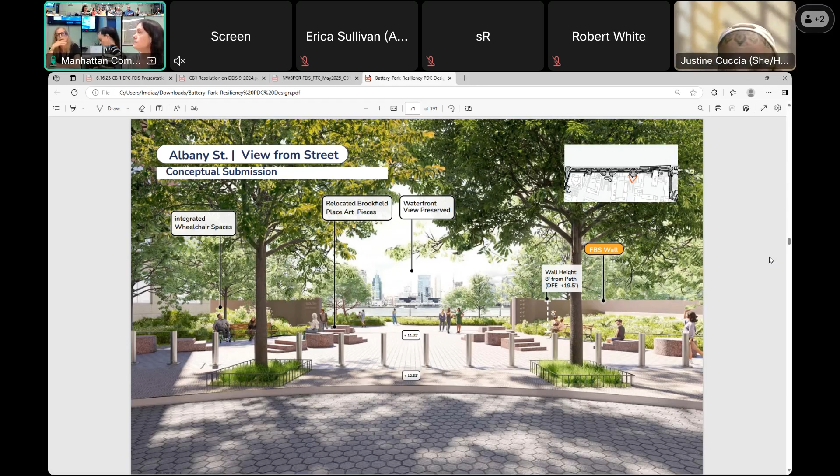But I think we've heard what you said, we'll take it back. Maybe there's a compromise here too, maybe it's not one or the other, maybe it's something else, but we'll leave it with you, the designer and expert, and we'd love to have a longer discussion. We may come back to you with a larger discussion on this kind of stuff, which we would love to do, because I hear what Jeff's saying, but there are other places perhaps that...

That are barren, like what you told us about the end of Liberty Street that goes down to the marina. We understood that you were removing all the trees from that, so there'd be no more greenery, no more trees. That goes down towards the police memorial.

So it's a question of what's going on. Let's table the solution here, I don't think we need to solve this one right now. This is why we have these meetings, right? They don't live there, correct. So I understand you're trying to save the art, right? And in that case, it was like, well, the art's okay, but what we really wanted was a gathering space, right?

So maybe that's a way we can have a conversation about it. I think we're not trying to shut down the art. We've taken a lot of feedback over the past three years from what people want, and trying to balance what people want and what they don't want is always challenging. So I think we can take this back and we'll see what we can do.

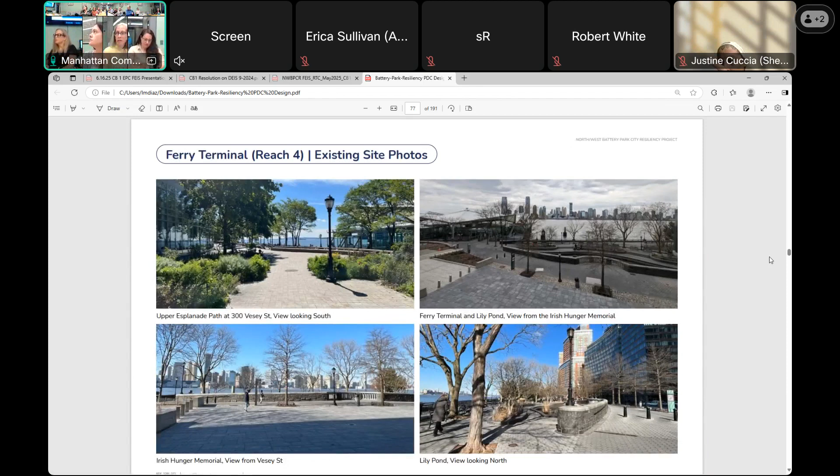I don't think we need to review the existing conditions, especially since everybody here knows them very well.

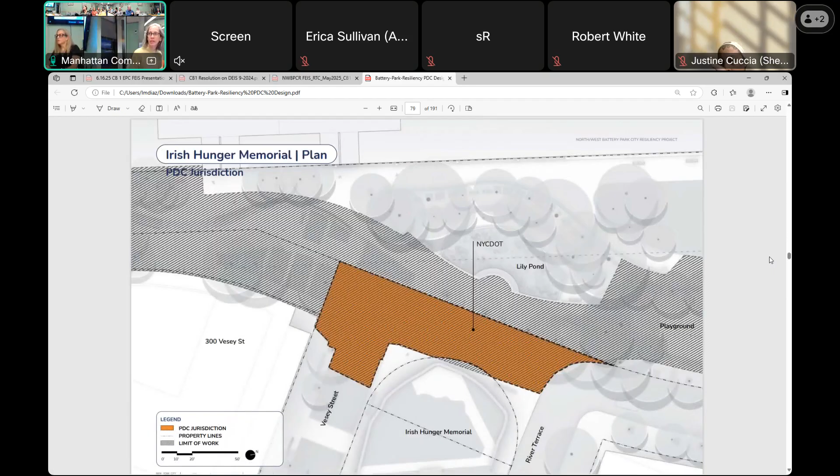Again, this is the jurisdiction map - blue is city DOT, and orange is the kind of overlap. This is the existing condition.

So we have a section going through, on the right side we can see the memorial, it's going through the plaza that kind of slopes up very gently, and then you can see the lily pond on the opposite side, and the rest of the park and esplanade that are on a platform in this area.

On the next slide, we can see that with the FBS and the gate introduced. So you can really see we're trying to minimize impact both to the Irish Memorial and the plaza in front of it, which we know is used for events and a lot of activities, and to the lily pond on the opposite side.

You can see that in the following sequence of views. So we have the existing conditions.

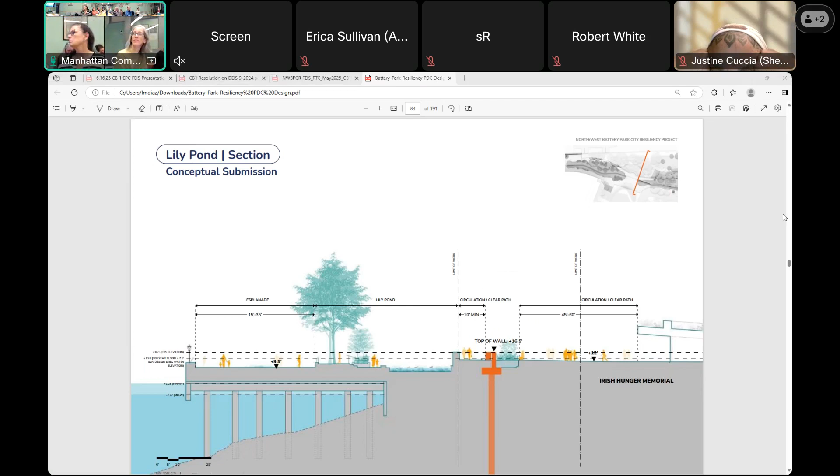Oops, it's not working. Gotcha. That one? Sorry, we have another section that I forgot. This is looking south, so that's 300 Vesey. Then go next - Claudia's looking, she's got it. I got it up again. I think it just needs a little text.

So this is just a view looking from the memorial, which is on our right, we're looking toward the water. And then on the next view, we see it with the flood barrier wall.

This is one of the areas where we have enough space to surround the wall with planting. We're also raising the planting here, so you'll see the wood clad planter wall, and this allows us to hide as much of the wall as we can in this area.

So that balustrade remains, that's the edge of the lily pond on the opposite side. The flood wall is really nestled in the planting on the left, and you can see a little bit of it on the right. This is also another very wide opening - it's a 50-foot wide roller gate in this location.

Looking a little bit at the materiality, so we do have the special paving here. That's the Irish Kilkenny stone. We have on both sides of it the asphalt mix pavers that are the typical park condition.

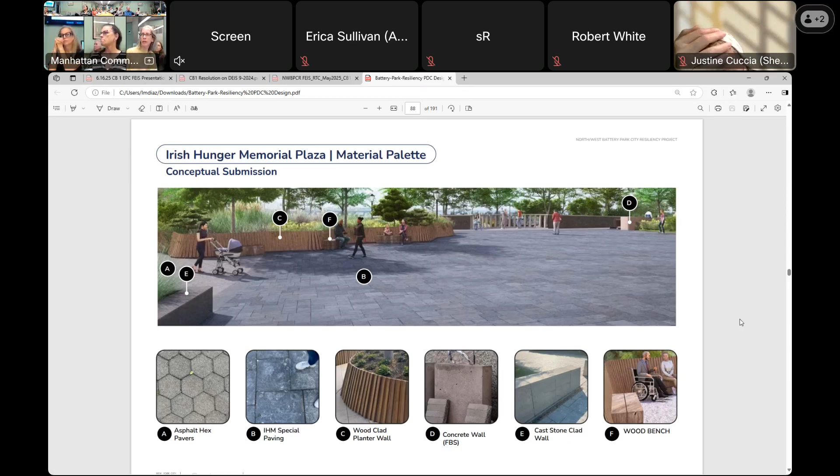Is the art that's on the south side of the Irish Hunger Memorial gone? Those, I know they're very expensive, the lit glass benches and all of that. So 2 of those benches closest to the ferry terminal are going to be impacted, but the remainder will stay. And the materiality, is that a stone granite wall over there versus cement?

Planting in this area is a bit more coastal - coastal shrubs and dune landscape, but again, emphasis on native species.

One of the comments that we got from the Public Design Commission as part of the walkthrough was they wanted to understand more about the color choice of the flood barrier wall, and they asked specifically to look at the Irish Memorial area and see if that is the right choice there. So we're looking at in this presentation, looking at 3 options.

We included a view of the memorial itself, just to put it in context with the existing materials. That's a very dark gray, but surrounding buildings have a lot of orange and red and warm colors to them.

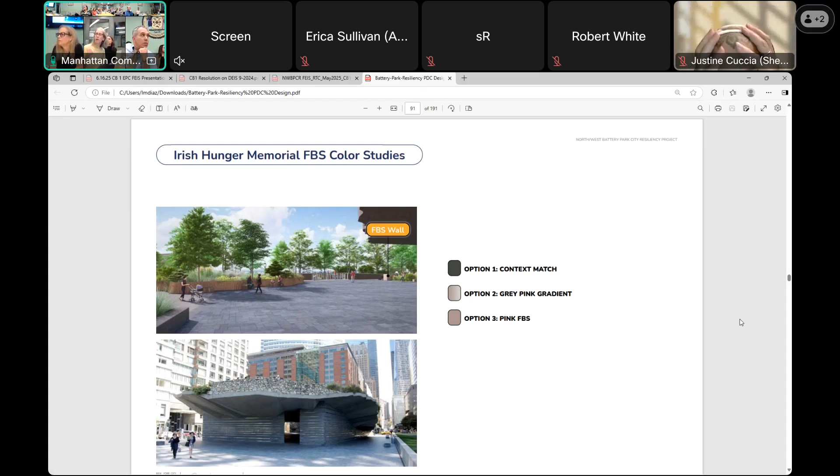So on the next slide, we have a series of views really from this vantage point. Again, this area in particular is not in PDC's jurisdiction, but it seemed like the best way to portray all the different materials.

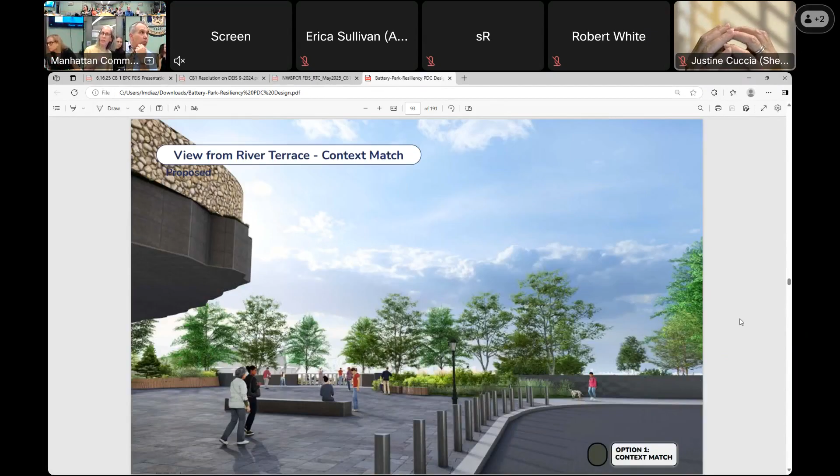So we have this one option, which is what we're calling a context match. It's a dark gray instead of the light pink that is trying to match the palette of the Kilkenny stone and the Irish Hunger Memorial.

Oh, hello laptop. That's not good. Keep going.

Matching the gray exactly is very challenging, and we felt like the right way to respect the memorial was to do something different from it. The other consideration is we're showing the planting in full bloom, very green, springtime and summertime. The reality is fall and winter do come and the colors are a lot less vibrant, so we felt the pink does introduce a warmer tone for those seasons. This is part of the conversation that's still ongoing, and this is the study we presented last week.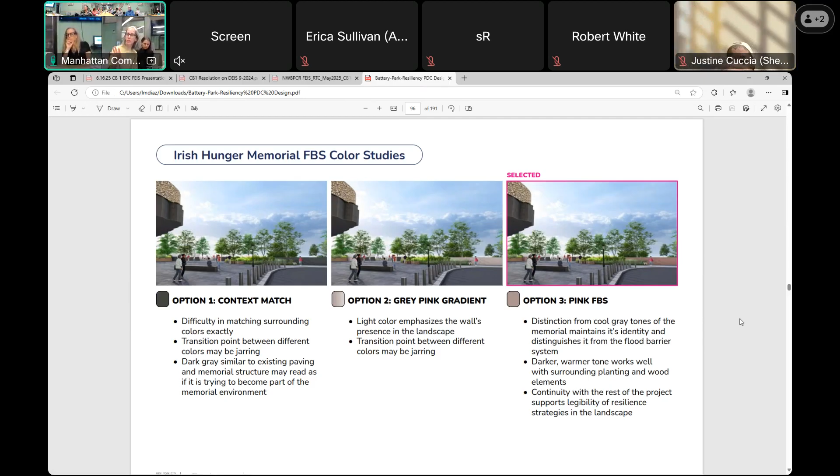Just a question - so there will be no way to have any placemaking at the end of those streets to see the water, unlike the other street ends where you've made abilities to see from roller gates and things like that? At this point, if you're walking down Vesey, you will not see the water at either side.

Of the Irish Hunger Memorial, the lily pond is actually the thing blocking the view there. But you can see the Hudson - you'll be able to see it from that Lily Pond area. Because we're not narrowing that opening, it remains the same as the Lily Pond is, so you can still see it from there. Okay, thank you.

Okay, so now back to me. Now we're going all the way up to Reach One to look at the two small areas of PDC jurisdiction that we talked about before.

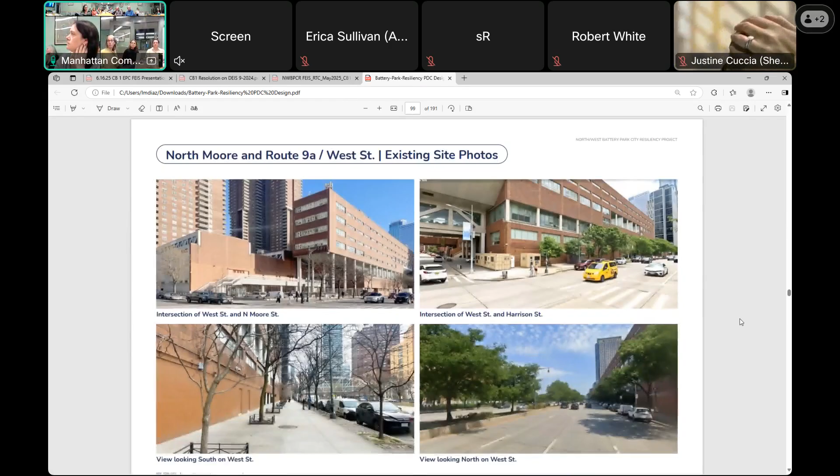We can skip the existing photos. This is looking at North Moore Street. Everything within blue is within NYC DOT. As we said before, 9A West Street was all New York State DOT until it butts all the way up against the BPC property line, so there is no PDC jurisdiction along 9A West Street.

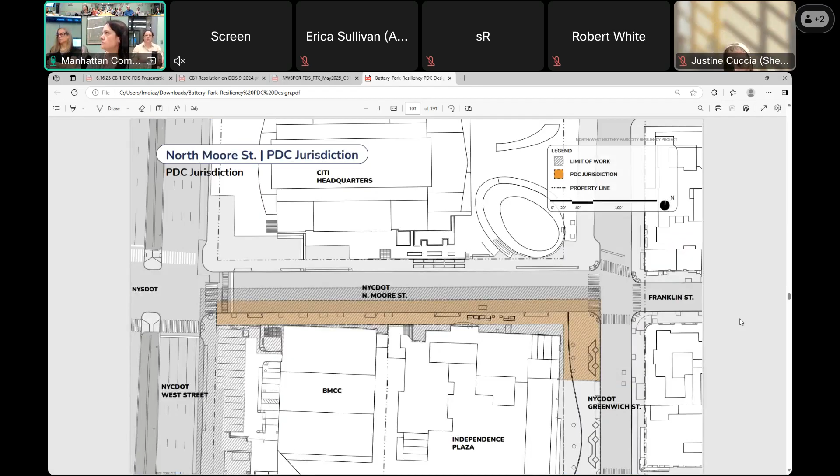Next slide - this is the sliver of North Moore that is within PDC jurisdiction, so it's pretty much all of Northmore. Next slide please.

This is showing the existing condition - it's a relatively narrow sidewalk. The slope, I can't quite see what it is, but I know it starts down close to 9A and slopes all the way up to, I believe, 12 feet. Yes, so it's quite a big slope as you're walking up the sidewalk to get inland, which is why we've identified this area as the best place for the high ground tie-back for the wall.

Next slide please. This is from the West Street side to Greenwich Street. One of the things we're really struggling with in this area is that we have quite a few Con Ed vaults here, and we don't want to disturb the vault because it'll trigger a long lead time in getting the vaults relocated. We're also constrained by the face of the building - we need to pull the wall a certain number of feet off of it. There's also a very large water main that runs along the line of the curb that's there today, and we're required by city standards to be a minimum of 3 feet off of that. So as you can see, there's not a lot of places we can locate the wall in this area.

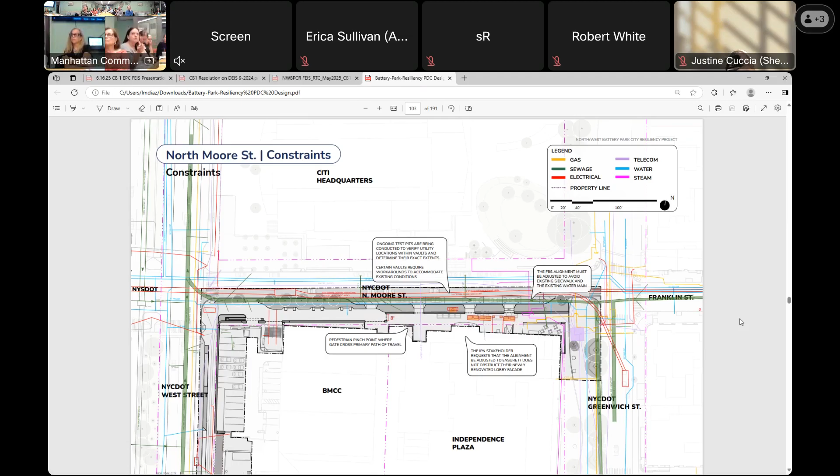Next slide please. I'd also note, just to talk about Northmore, we also have a high voltage line that runs down the middle of North Moore Street as well. So lots of cool stuff going on there.

It's really amazing how much goes on underneath the New York streets. It's really incredible how the city is built.

One of the great things we're doing about Northmore is the sidewalk expansion - we're expanding the sidewalk 12 feet into Northmore. Right now Northmore is a 3-lane road; we'll be taking it down to 2, and we will maintain the parallel parking on each side of the road that's there today. A couple of other design changes in Northmore that are new to you guys: we've realigned the curb cuts with the entrances and maintenance entrances to the buildings.

We've kind of cleaned that up a little bit. And then you can also see where the orange line of the FBS is going. That is threading in between the existing vaults that are there today. I will say that this area is still under intense design, and it's because we're getting more information back from building stakeholders, from the city DOT as well. So the next time you guys see this area, it might change quite a bit, and we're still trying to figure out what that looks like, which is why this is the material for the preliminary design.

One of the things that I will note is that with this 12-foot sidewalk expansion, we are getting a much more generous sidewalk, especially as you get down to the corner of North Moore and 9A. Right now in this scheme, it gets to be about 15 feet wide, and we're proposing some additional DOT benches. And then we're also far enough away from the wall that we can introduce some more trees and plant materials.

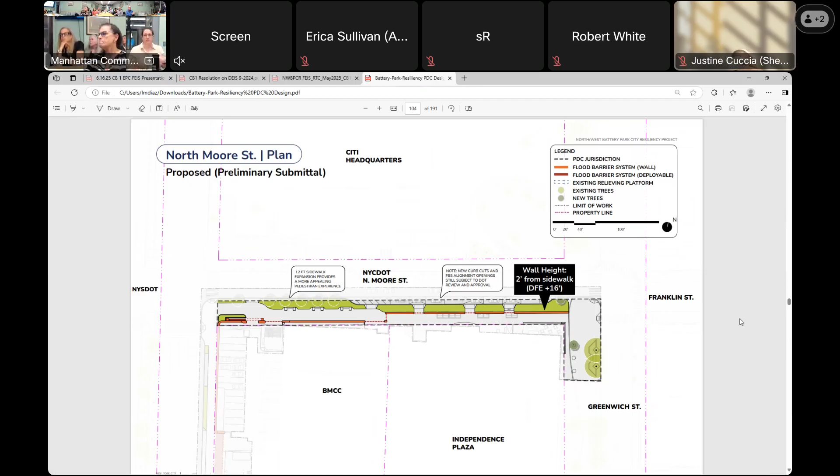Do you have to go to LPC then because of Harrison? Because of the cobblestone? No, we have to consult with them as part of the EIS process, because of the area of potential impact, but we don't have to because we're at the end of Harrison Street, we're not up by the federal townhouses that are closer to the historic district and are the landmarks themselves.

So here in this interesting photo, you can see the Con Ed vaults, and then, no, it's okay, you're great. And where the FBS is going is approximately where the existing curb line is today. And then you can see we've also rendered in Independence Plaza's new building facade, which they recently finished. We actually got to model this and render it before they were finished, so we knew what it looked like before. And we are getting a lot of feedback from them regarding the location of the wall right in front of this new facade renovation. And we're really taking that into account when we're looking at the redesign of this area.

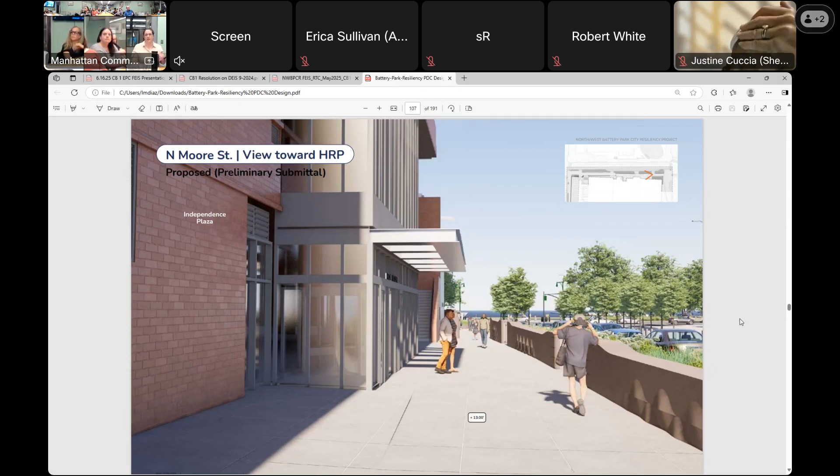And the next slide shows the materials. It shows kind of the existing facade; BMCC and Independence Plaza are brick. We're looking at doing the FBS in integral color and form lines. Concrete, this has a New York City standard DOT concrete sidewalk. Here we've identified some glass doors, and then we're showing some of the planting palette. I think that is it. Oh, we do have the planting palette for Reach One as well.

Would the planting palette be symmetrical all the way around? I mean, some contextuality, but is there a difference from reach to reach? Yeah. Yes, that's good. There is a difference currently, so that's something that we're trying to play into. But in the same way, there is a difference in the design. Obviously, it's not exactly the same. Homogeneous, yeah. We're trying to enhance the existing character and then find opportunities to add more native species, more salt tolerant species. Interesting. Specifically in Reach One, these are really the hard workers. It's a lot more exposed. A lot more what? Exposed to just traffic and city street.

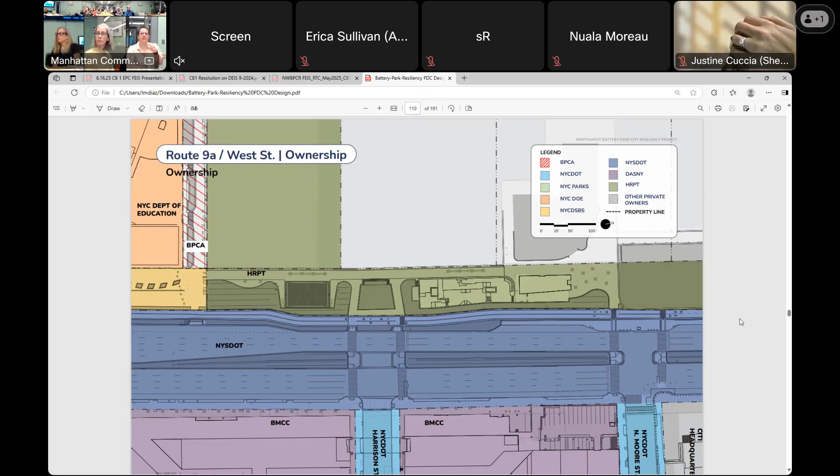And then this is looking at the 9A West Street ownership. Again, you can see everything that's in that darker purple is in New York State DOT jurisdiction. Everything in the light purple is BMCC. And then everything that is in that cyan blue is New York City DOT. And so we'll zoom into that little thumbnail that is the Harrison area. And so this is showing PDC jurisdiction in that area.

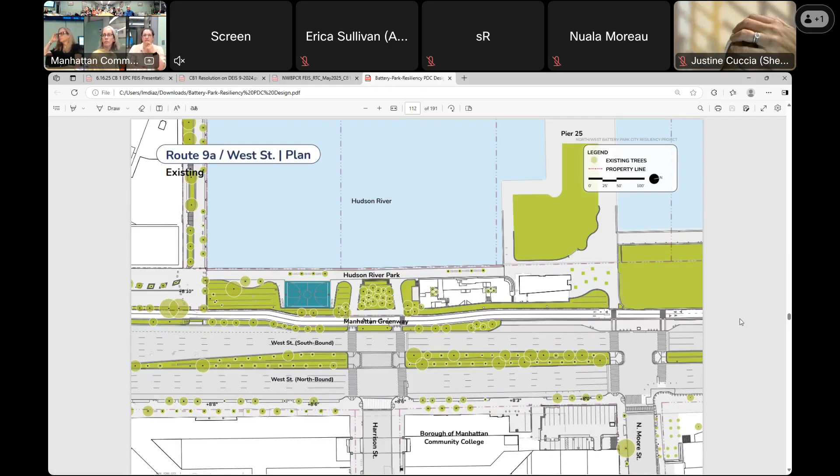The next slide shows the existing conditions. A couple things to note, the BMCC building actually spans over Harrison Street, so it's a little bit of a darkened corridor. It also does have the historic cobblestones, and it's been kind of self-identified by BMCC as a little bit of a dead zone. So we can look at the next slide there. One of the big things that we looked into with this in coordinating with BMCC is they did ask us to maintain a minimum of 8 feet offset from their wall so that they're able to do facade maintenance and they're able to access the base of their building.

They also have asked us to use this area for storage, and so we've done that. Another thing to add that is probably a change since you guys have seen this last: this was originally a swing gate in Harrison Street, and it had a large median in the center of the road where the gate was stored. A lot of the feedback that we received, both from you guys and from DOT, was that it was an eyesore and that it impeded views to the water from the historic Harrison Street.

So the design team has come back and we're actually doing a flip-up. So it opens the view up completely in this area. And I think we have a couple different views as we flip through these. Do you want to talk about the swing gates and the lighting company?

Well, they're here. Oh, you can see them, yes, so this is really good. This is the one that I remember. Yeah, this is what I was talking about earlier. If you see, they're in the median closer to Chambers Street, on the right-hand side of this. Like I said, it narrowed the lane slightly, but that's how we store them. And then they connect on the west side and the east side to pillars that are in the roadway or on the sidewalk. And then along 9A, you'll see a series of flip-up gates.

So there'll be openings, basically to maintain regular access to BMCC because they have a lot of service and loading docks. You want to be able to maintain that access that they have there, so that's why you see that. So that's a big improvement. Right. Thank you.

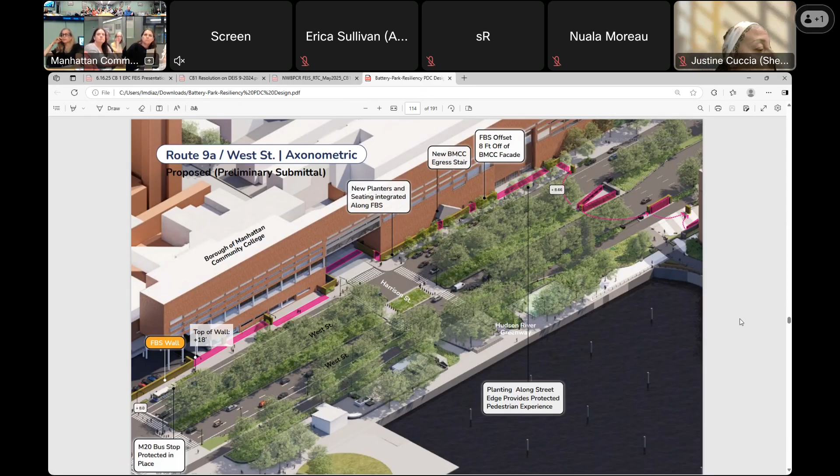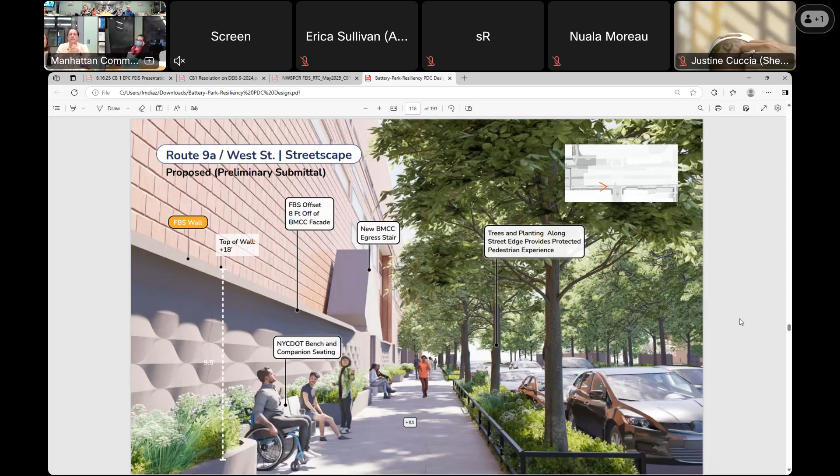This is an important lighting location simply because of the way that their fencing works. Yeah. They have an incredible amount of light that comes out there, so that corner never feels dark. Yes. So it is a concern with that wall where you have it, that it will not allow light to come through to the sidewalk, and it will make that entire stretch feel very desolate.

Right. We have identified the same issue, and we are working with a lighting engineer, and we're doing a lot of different photometric analysis on the existing lighting and the effect that the wall will have on it. It's a really good plan. And that's something that BMCC also reviewed with us. We were proposing this too, so they asked us to look at it as well.

That and also making sure we're not creating any corridors in the areas where we do have kind of the interstitial space between the wall and the building. We have industrial gates where people can egress if they get trapped behind them, but they can't access them on a normal basis. And have you done wind studies on this?

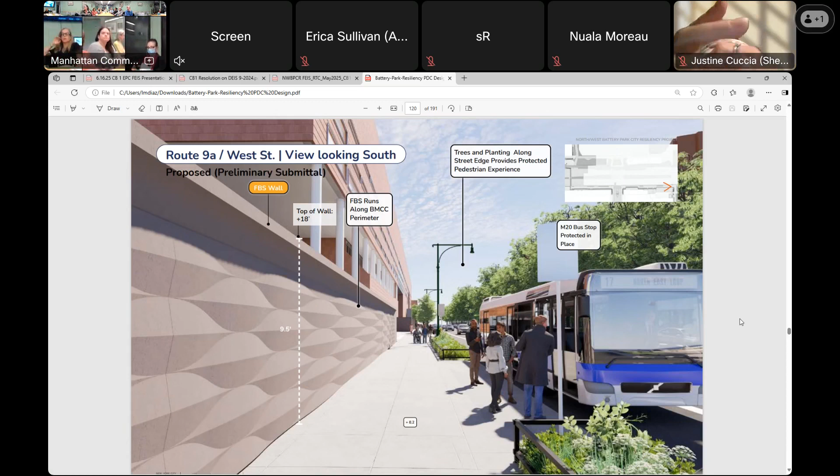It's not that big a space, but, oh, sure, we should go to the next one. Okay, yeah, we're almost done.

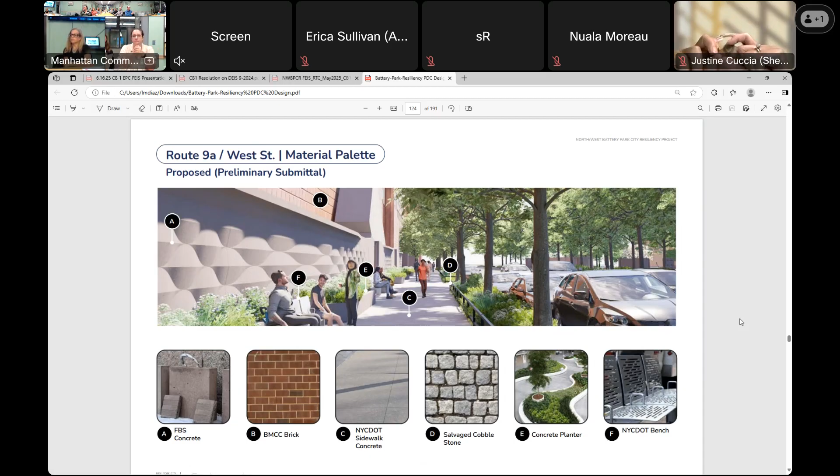Again, we're doing the integral color and form liner, cast-in-place flood wall. There's the BMCC existing brick. Most of the paving will be the New York City standard DOT concrete. We are proposing to put back the cobble band that's behind the back of the curb. This is the amenity area where parking meters and street signs go. And we're also proposing these raised precast concrete planters and putting the DOT benches back. And then the next couple slides are the planting palette, and that's a wrap for BMCC.

So what we did with them in 10 minutes, we just did with you and Karen. Great. Yeah, we know how to stretch it out here. They don't live down here. They don't have these curious questions because they don't know it.